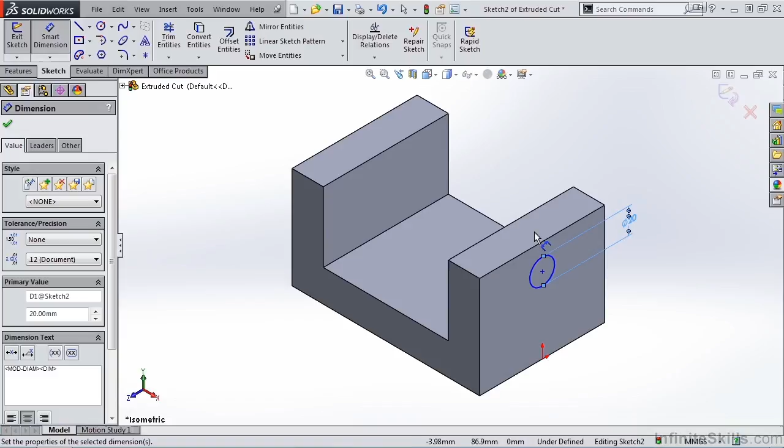I am going to create a circle on that face and then dimension that circle to a size of 20 millimeters. Now I'm going to close out of the sketch, and you'll see the Property Manager opens for Cut Extrude. Now this Property Manager looks very similar to the Extruded Boss Base Property Manager.

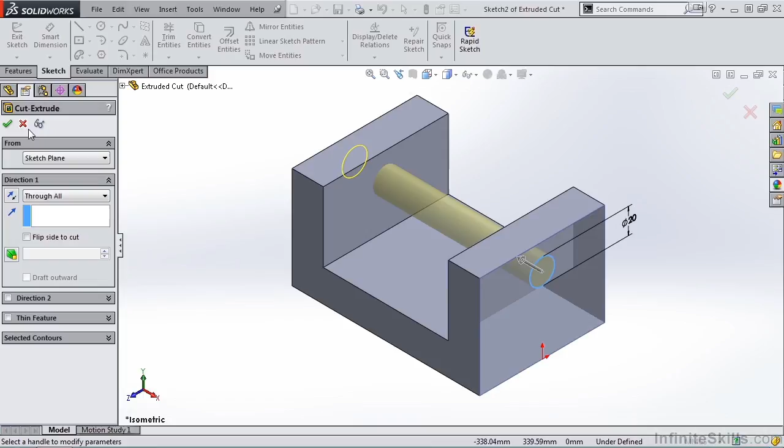However, we do have one additional end condition, through all. I'm going to set this to through all and close out of the Cut Extrude Property Manager. The nice thing about through all is if I go to change the length or the width of this part, the hole will still continue to pass all the way through the part.

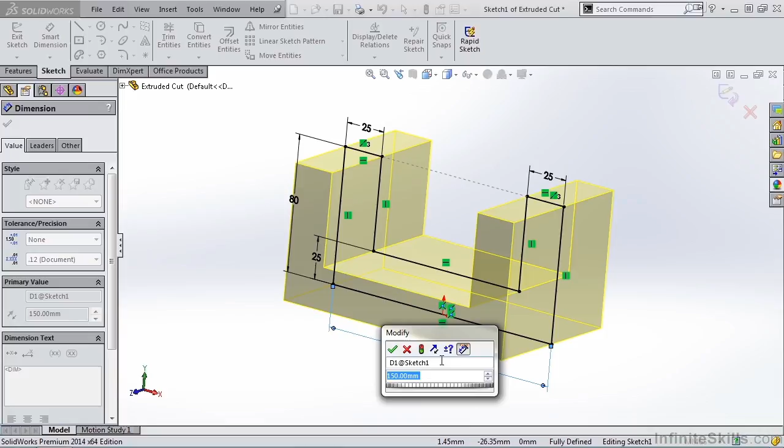So let's try that. I am going to edit this sketch for the Boss Extrude 1. I'll change this 150 to 200. I'll close out of the sketch, and notice the hole still cuts all the way through the entire part. And again, that's because the through all option was selected for the end condition.

Let's go back and edit the Cut Extrude. And notice we do have other end conditions, like we've seen with the Extruded Boss Base feature: blind, up to next, up to vertex, up to surface, mid-plane, along with a few others. We can also set a draft and a direction 2, just like we could with the Extruded Boss Base feature.

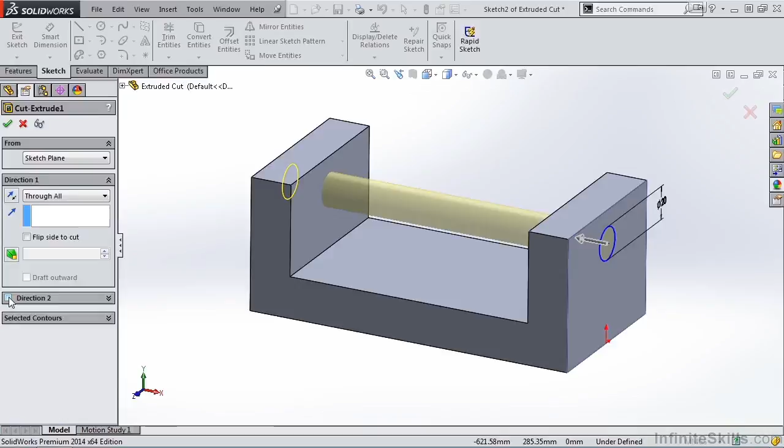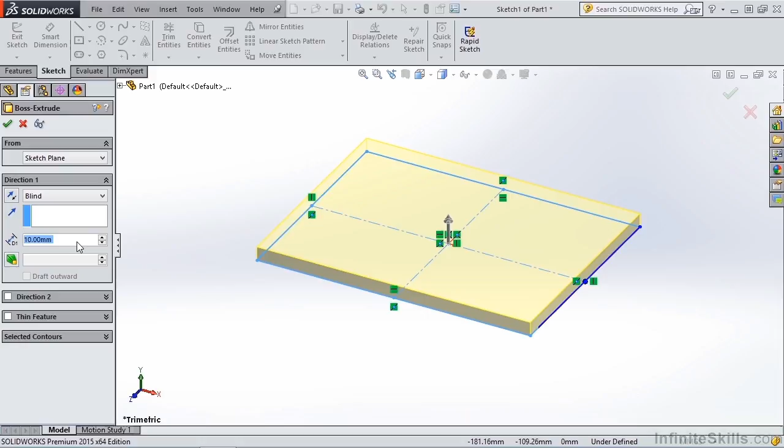Let's go ahead and close out of this part so I can show you how to create an extruded cut with an open profile. First, I need to create a new part on the screen. So I'm going to go to the Extruded Boss Base feature. I'll create a new sketch on the top plane, select a center point rectangle, draw that rectangle, close out of the sketch, and apply a thickness of 100 millimeters.

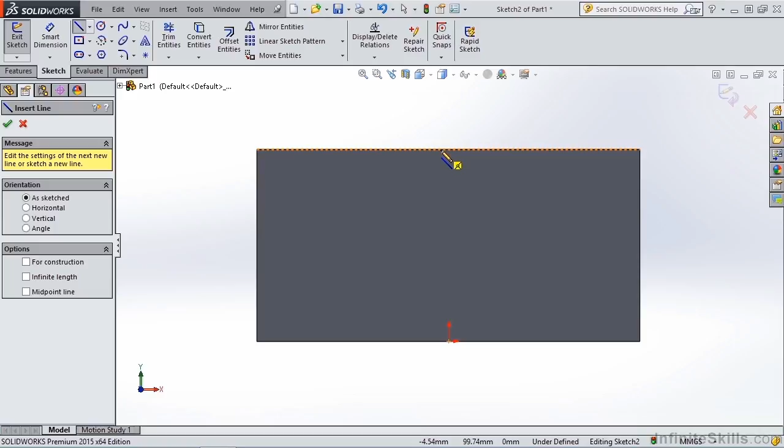I'll then close out of the Boss Extrude feature. Let's go ahead and fit that to the screen by tapping the F key on the keyboard. Next, I'm going to create a new sketch on the front face of this part. I'll go into my line tool, and I'll begin to draw a few lines, and I'll add an arc into this sketch.

I'll close out of the line tool, rotate the model, and as you can see, I have an open profile. I did not sketch geometry to close off that profile, and I did not convert entities. Now the requirement for extrude cutting an open profile is the sketch must intersect the model. So you can see we have a coincident relation here and down here.

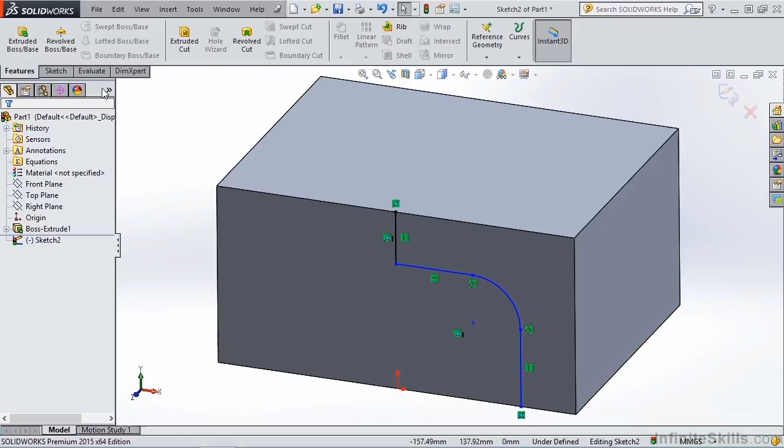Now let's go to the Extruded Cut feature. We'll rotate the model once again so we can see what's taking place. And you can see that SOLIDWORKS recognizes these edges as part of the profile. I'll key in a distance for the depth of 75 millimeters, close out of the Cut Extrude feature, and it adds that Cut Extrude to the part.